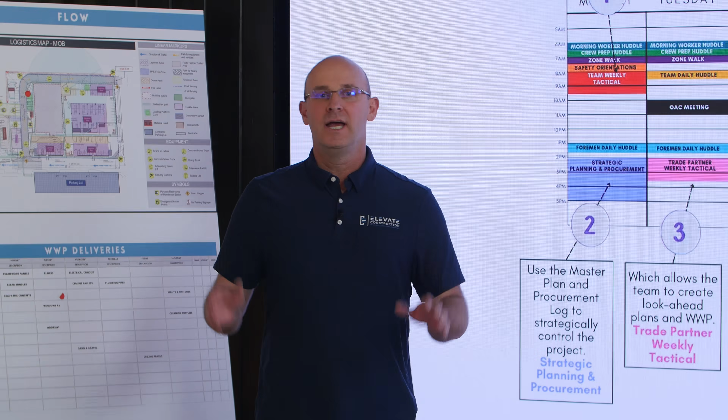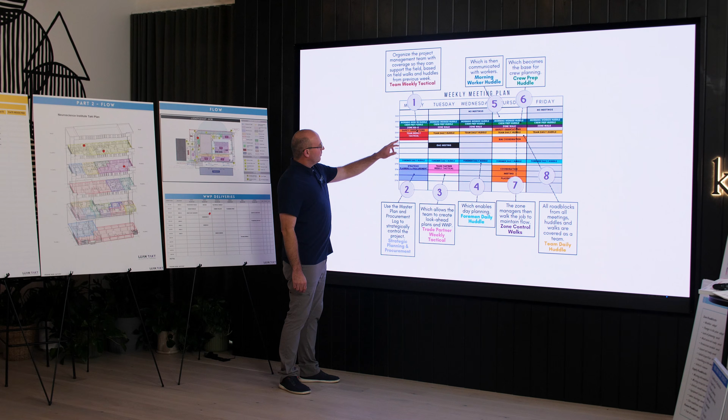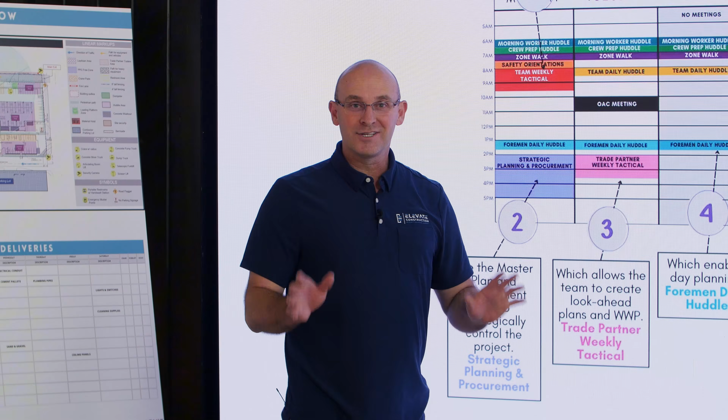Day planning and construction. I'm excited because in this video, I'm going to talk to you about day planning and when it should happen. I'm so passionate about this, and I think you're going to love it. So we've already built the team or balanced the project delivery team. We already have the macro and the supply chains managed, and we have our look ahead and weekly work planning done. Now it's time to use that, the utility of the weekly work plan, for day planning.

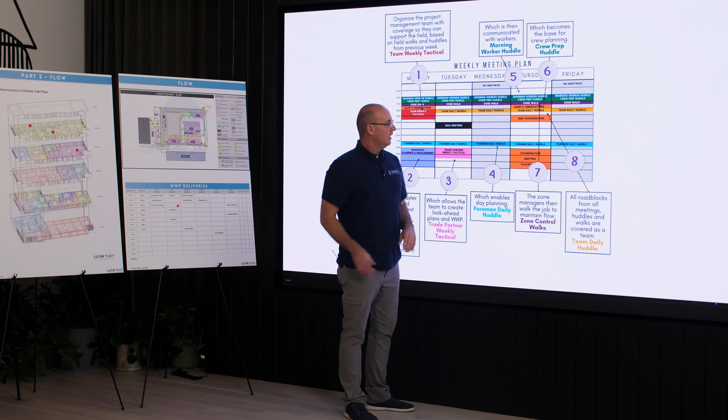And this is absolutely phenomenal. Now, I want to make a point. If you have these foreman huddles in the morning, they're not foreman huddles. They're just information sharing huddles, which is fine. But you have to have the foreman huddles in the afternoon before, for a couple of reasons.

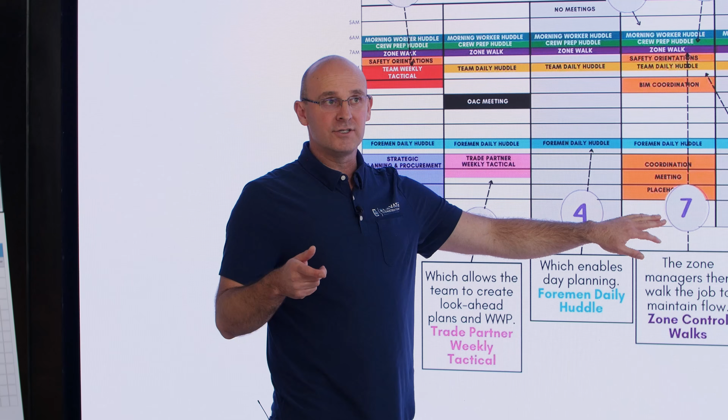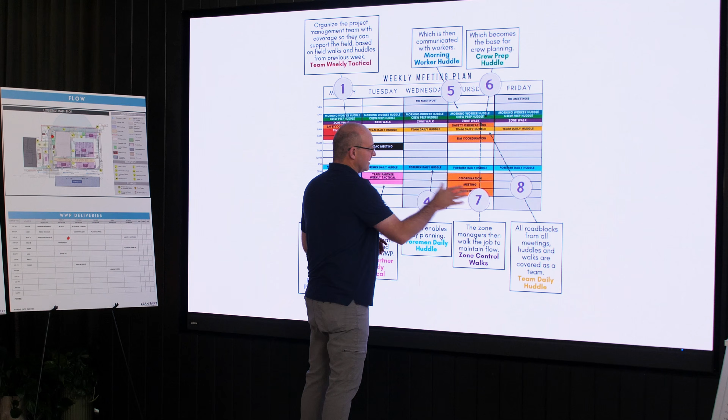Number one, if you're planning the next day, you can't make substantial changes to it if you're doing it same day, but you can make substantial changes to the next day if you're planning the day before. What I'm saying is, if you're going to plan this day, you have time here to go get a ladder, a generator, extension cord, or whatever you need, so that by the time the crews come for the morning worker huddle, they're ready to go.

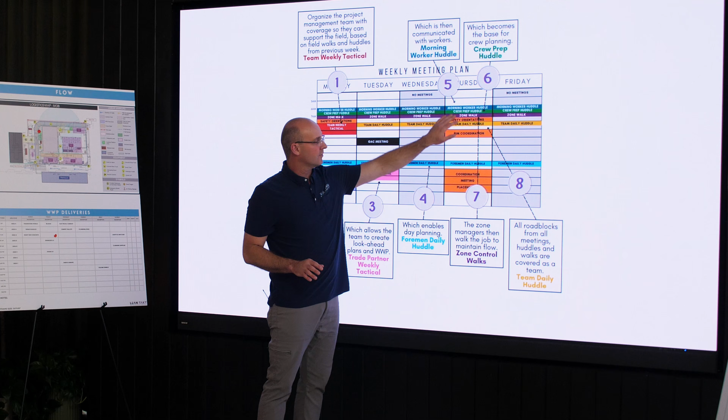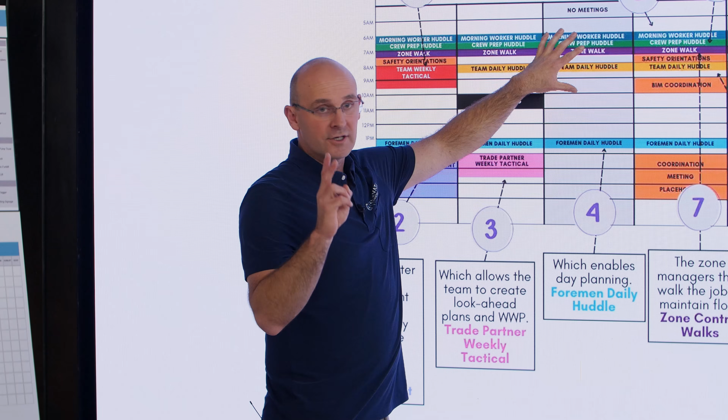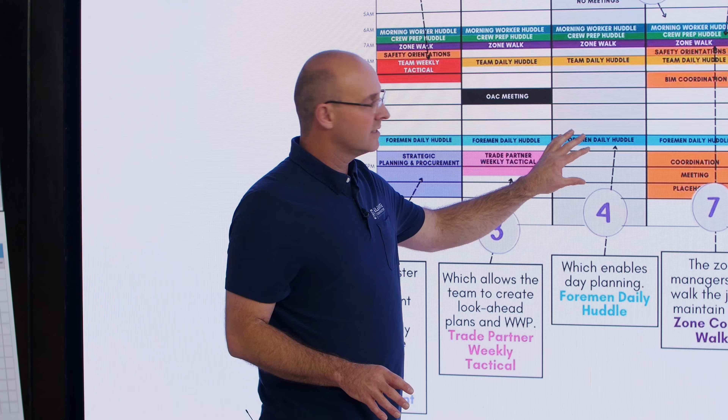The other thing is, workers are most productive in the morning. We don't want to change the plan and cause variation, and we don't want to confuse them. We don't want to not have foremen with them. And when they're cleaning up in the afternoon and doing fairly standard rhythmic safer work, this is the time for the foremen to be in the huddle.

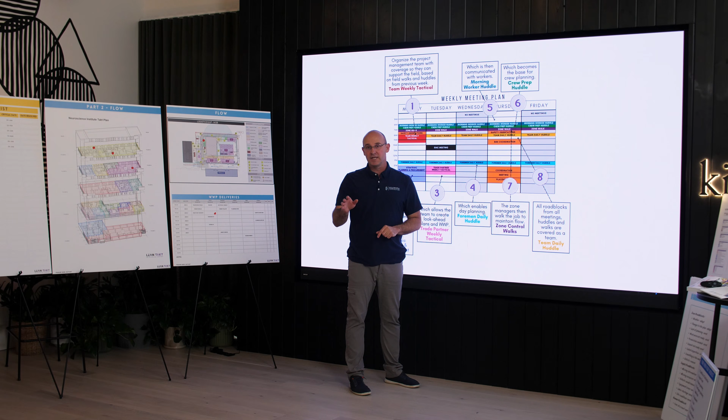If you have it the morning of, you will either have milquetoast meetings that are only talking about when and how much labor is a part of that activity, or you will reroute the work of the crews and lower production. So the foreman huddle happens the day before and plans the next day in what we call day tight compartments.

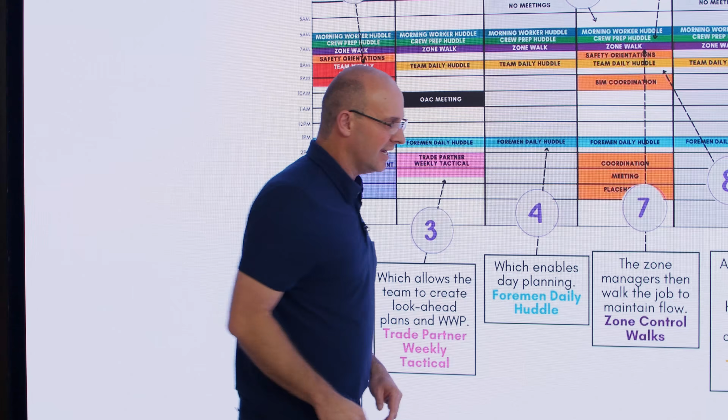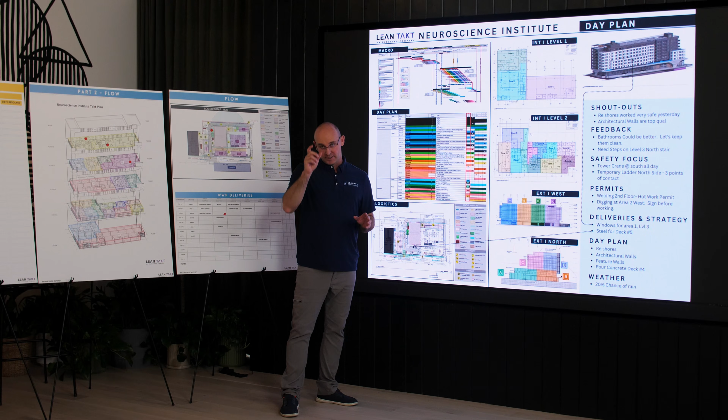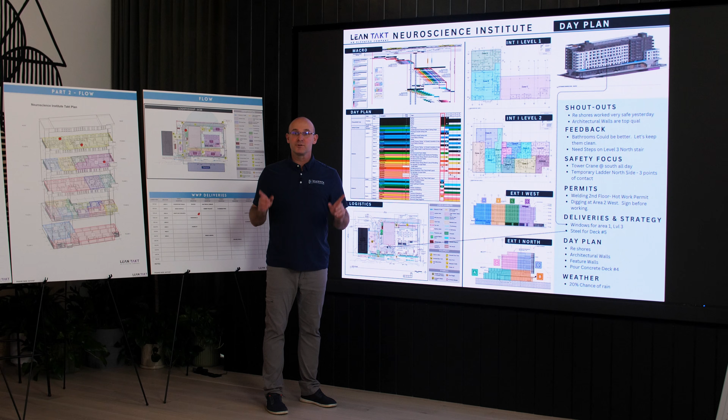Now I want to show you the visual that I like for day planning. You can use the weekly work plan as your day planning tool, but I prefer, and I'll tell you why, in Canva, that we have the day plan that's accessible by a single QR code to all of the workers on site. I love to have a big piece of plywood with a QR code that links to this graphic, and a superintendent, any superintendent, has the skill to use Canva. It's a very simple, beautiful program.

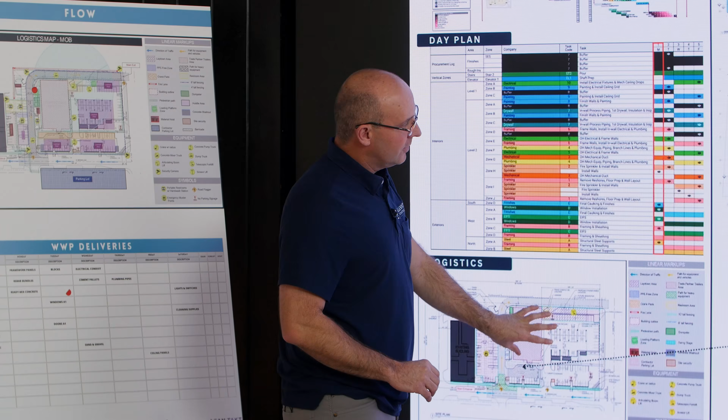And what you can do here is have your macro, you can have your weekly work plan filter, your logistics, your zone maps, and you can have an isometric of the building, and you can also have the agenda for the morning worker huddle for the next day.

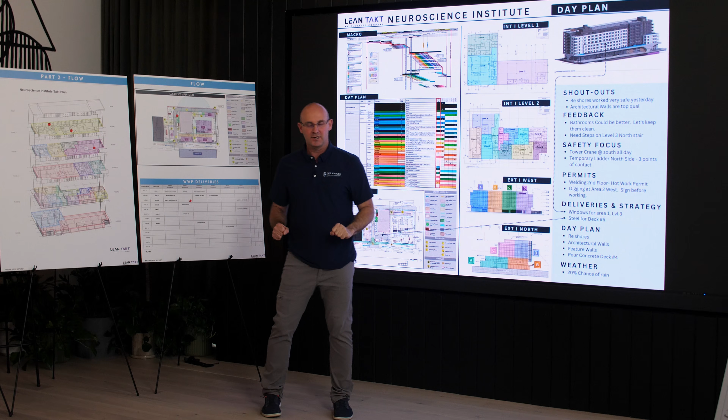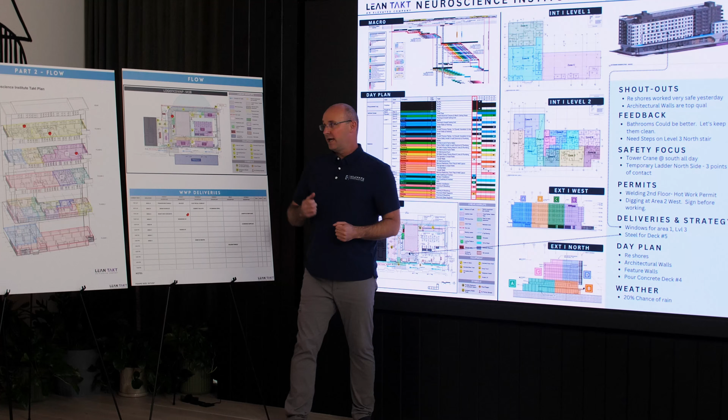It's so cool. In your meeting, when you're doing your afternoon foreman huddle, typically, and the agendas are in the book Takt Steering and Control, I'm keeping it simple right now, you'll say, hey, please turn in your daily reports, go through your normal agenda items, and yes, you will ask the trades to pre-populate any of the problems on red magnets or stickers before the meeting starts, because you don't want to waste time. And you will start to go through, from the weekly work plan, the plan for the day.

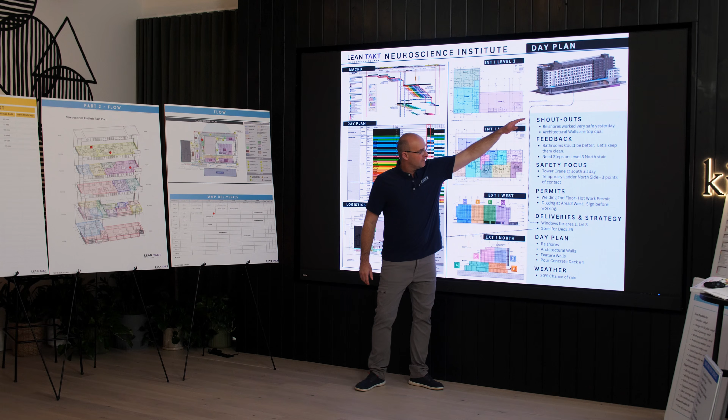And when you hit problems, where do you note them? Oh my gosh, we all know—right over there, you put another magnet on the board, because most of your meeting is going to be identifying,

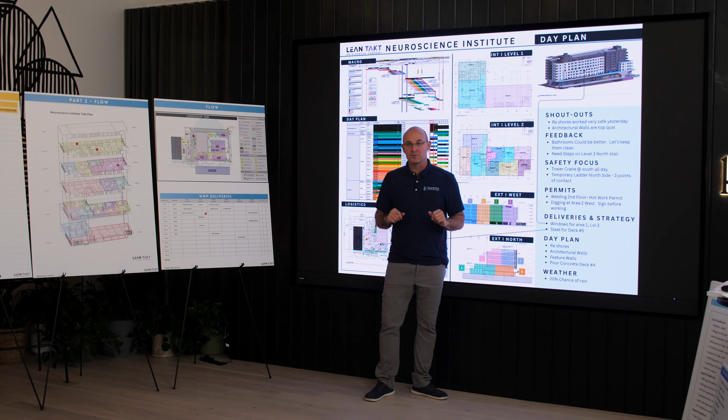discussing, and solving problems ahead of the next day. This is so cool, and you might think this is a little bit weird. It's like, how can you plan the next day for the whole job site? No. Crews plan their own work. This is the high-level macro plan.

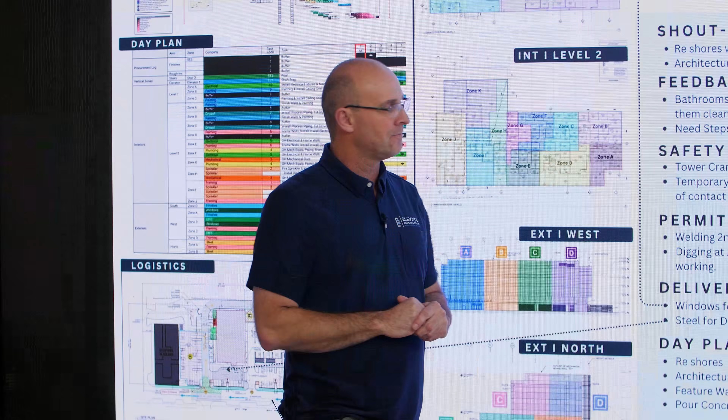Change points, as they say in Japan, the things that everybody needs to know and that you will communicate in the worker huddle the next day. What are we going to shout out the next day? What feedback are we going to ask for? What is our safety focus for tomorrow? What permits do we need to inform the entire team of by functional area in the morning worker huddle?

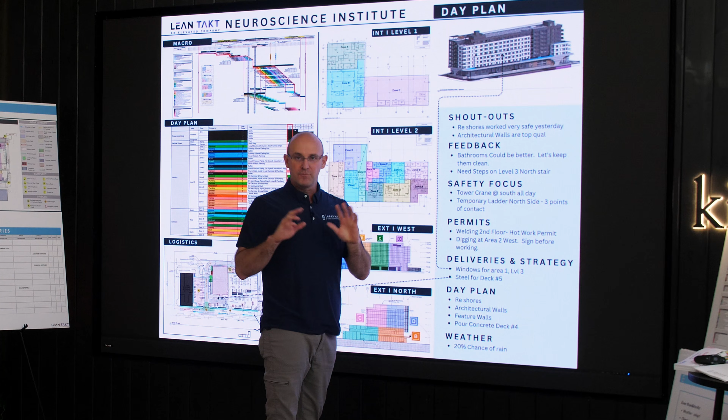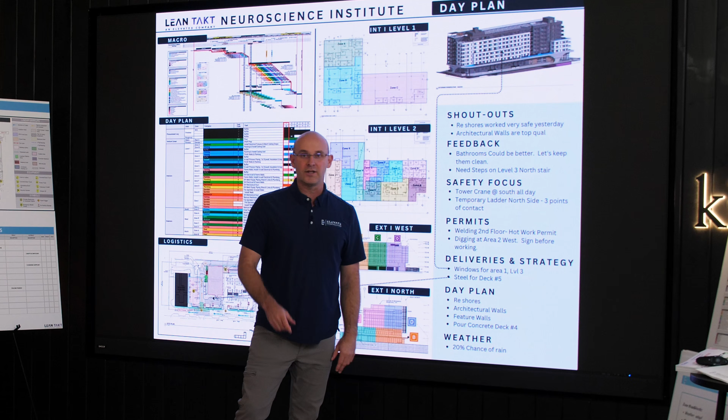What deliveries and where do they go, so they're not being moved all around? And then what are the big change points for the day and the weather? And as a part of this, we're also going to do 2 minutes of training.

Now think of this: what if you, as the superintendent over this functional area or this project, if it's the right size, had every worker seeing as a group, knowing as a group, and acting as a group with this information every day? It would be absolutely phenomenal.

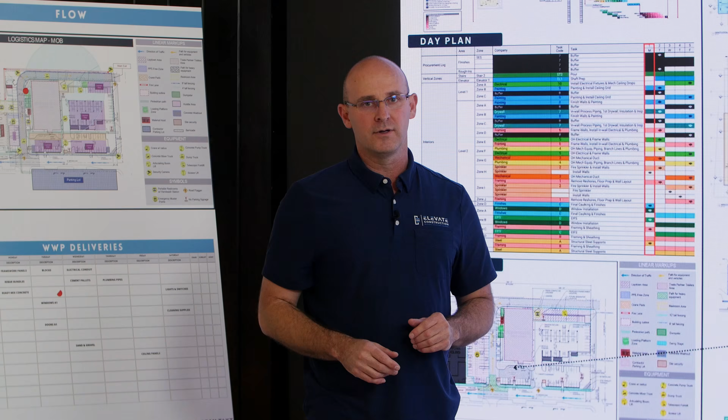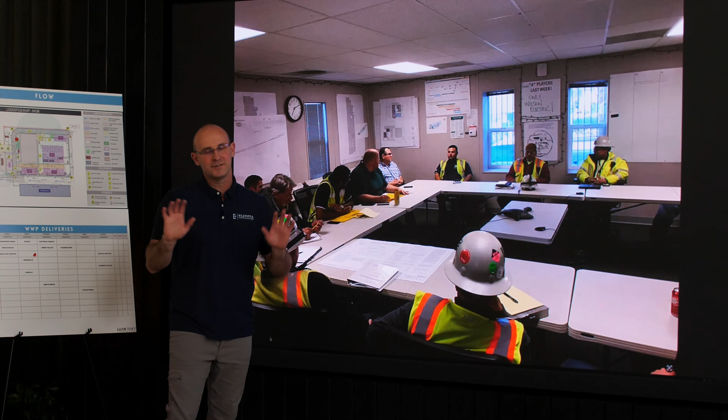Now let me show you what this looks like. This is an actual picture—sometimes people will tease me a bit and try and find somebody on their phone or whatever, but hey, I love you. This is an actual picture of when I was a project superintendent over the Bioscience Research Laboratory.

This is Jake Smaley, one of my homies. We've done podcasts together. You can see our conference room. This was primitive before we had all these, but they are coordinating the next day as foremen, and they're creating a day plan. One of the things I want to show you is what they're creating it for.

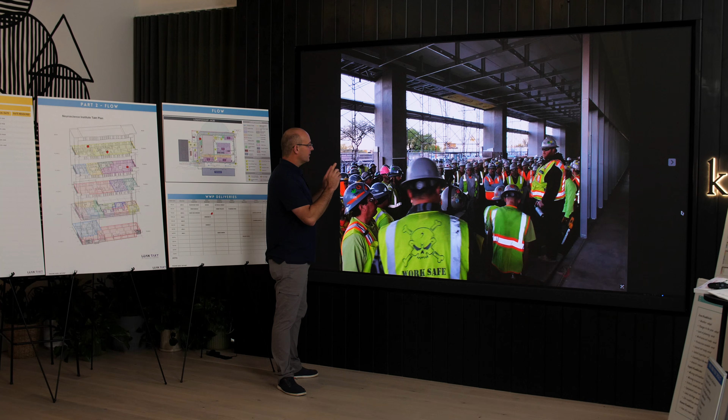This is the picture that I really want to focus on. The afternoon foreman huddle is so that we can communicate the plan to all the workers in a functional area the next day.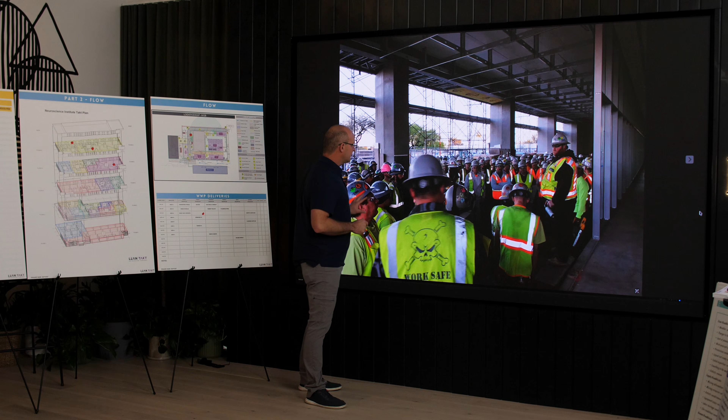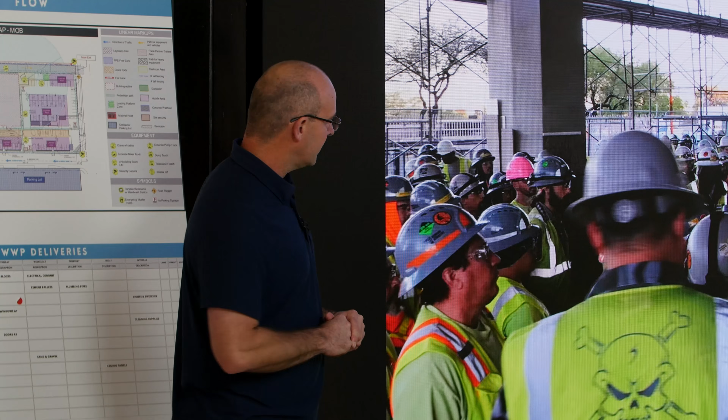This is that same project, the same Jake. He was the interior superintendent. These are the dedicated interiors workers and foremen. By the way, this is a respectful hard hat—this is his chosen hard hat for his company. I don't believe in punishing people with pink hard hats. That's not fair. There's nothing wrong with the color pink.

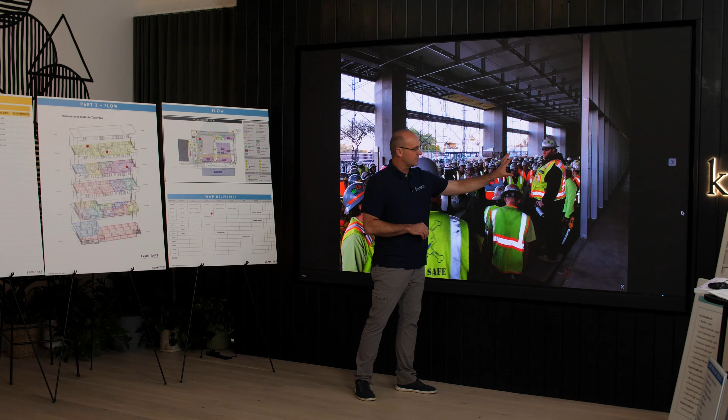And all of these workers who you can see all have their PPE on. They're all safe, they're all bought in, they're all paying attention, are receiving the plan of the day and have access to it on their phones because it was planned by the foreman the day before, and we've built one social group, and it's absolutely phenomenal.

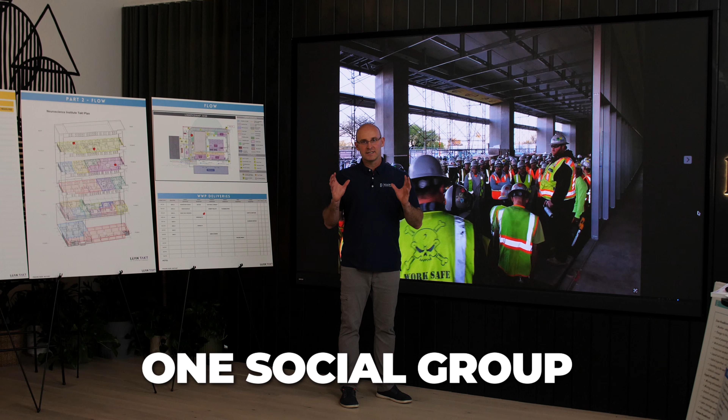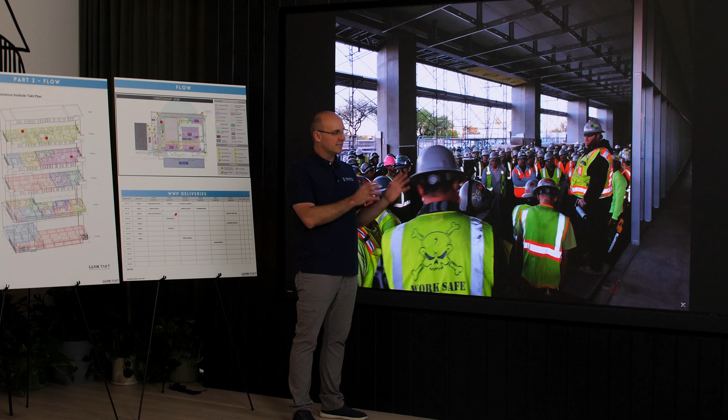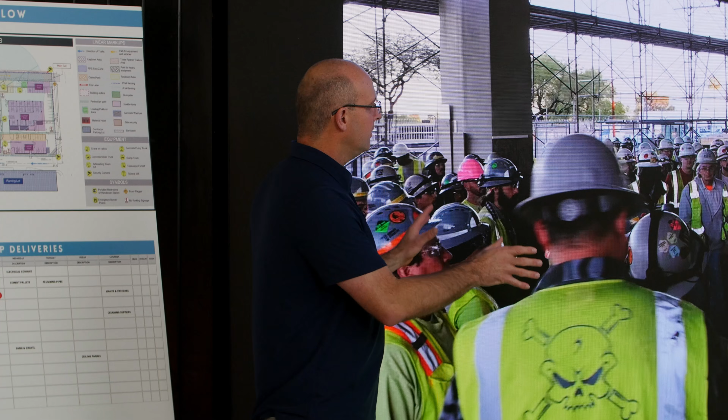You cannot have operational excellence on a job site without the morning worker huddle. One of the biggest additions to the last planner system is the addition of that worker huddle, and it's where we communicate the plan, and that's another reason why we can't do the foreman planning in the morning. The morning is for communicating the plan to the workers so they can work in day-tight compartments.